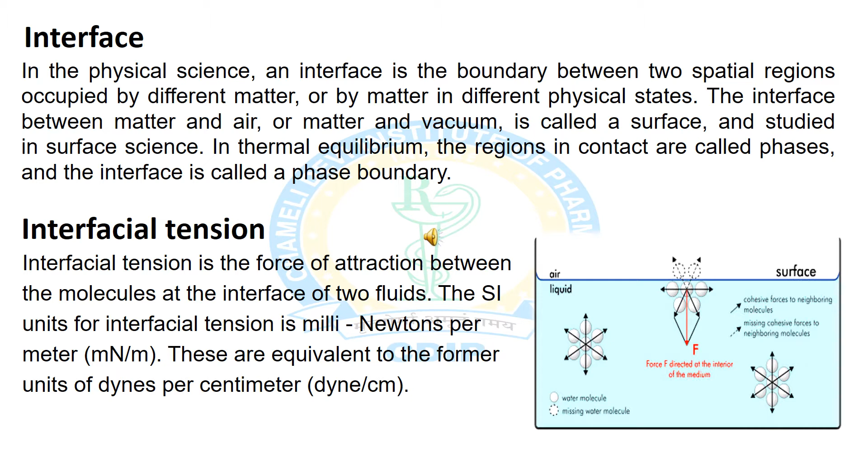Now coming to the next, surface tension. Surface tension is a phenomenon in which the surface of the liquid is in direct contact with the air. Surface tension can also be defined as the force acting at right angles to a line of unit length present in the surface. Surface tension is usually denoted by gamma.

As we all know, work done is equal to force into distance, therefore surface tension can be given as force upon distance. The SI unit of surface tension is newton per meter, or dyne per centimeter. The surface tension of a liquid is the energy required to increase the surface area, which increases the stability of the solution and increases the solubility rate.

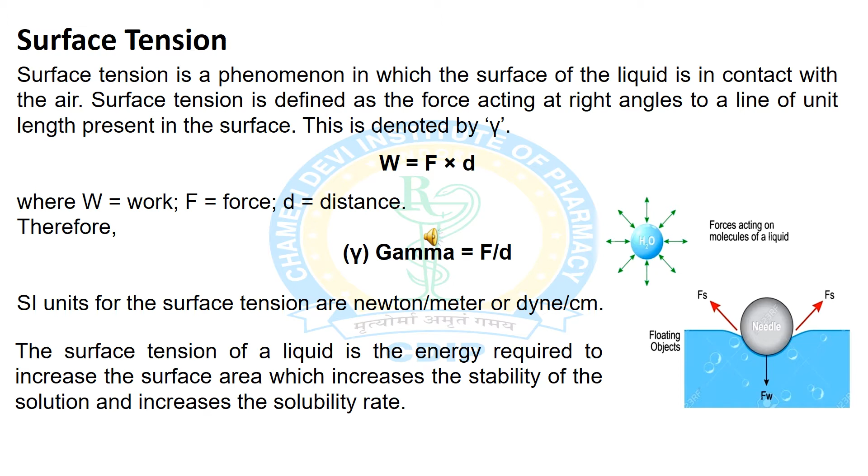As shown in the figure, a needle is floating on a liquid surface whose weight is acting downward and the surface tension force is acting on the molecule. The molecule present on the surface has a force acting on its lower surface, while the molecules in the liquid have the force acting all over the surface.

Next, there are some examples of surface tension. First is walking on water. A small insect such as a water strider can walk on water because its weight is not enough to penetrate the surface. Second example is floating of a needle. Third, surface tension disinfectants. Fourth, soaps and detergents. Next is surface tension and droplets.

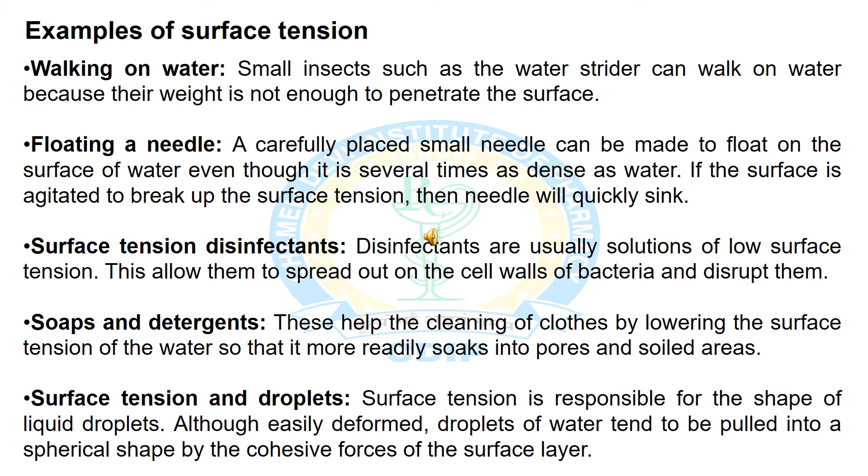Now next is surface tension at a molecular level. In general, water molecules want to cling to each other. At the surface, however, there are fewer water molecules that can cling due to air present above them. This results in a stronger bond between those molecules that actually come in contact with one another. As shown in the figure, a layer of strongly bonded water molecules at the surface, held together by surface tension, creates a considerable barrier between the atmosphere and the water.

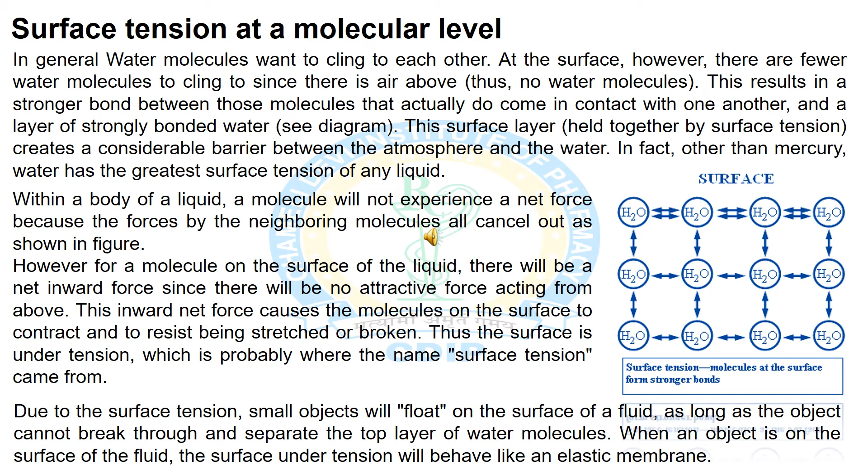The next is the surface tension of water at different temperatures. The table shows the effect of temperature on surface tension. A graph is plotted between the surface tension of water and the temperature. It also shows the variation in surface tension with increasing temperature.

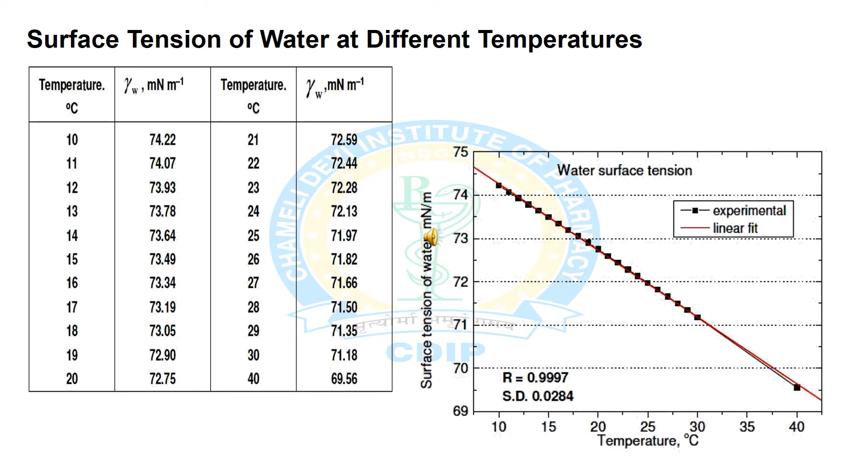Now, the next is measurement of surface tension. How can surface tension be determined? The first method is the capillary rise method. This is the oldest method for the determination of surface tension. A consequence of surface tension at the liquid-air interface is the moving up of the liquid into a thin capillary tube, which is usually made of glass. This phenomenon is applied for the determination of surface tension.

For this purpose, a thin circular glass capillary is dipped into the tested liquid. If the interaction forces of the liquid with the capillary wall, that is the force of adhesion, are stronger than the force of cohesion, the liquid wets the wall of the capillary and the liquid level rises into the capillary up to a defined level, forming a meniscus which is hemispherically concave in nature.

In the opposite situation, the forces cause the liquid level in the capillary to decrease below that in the chamber, and the meniscus is semispherically convex, as shown in figures A and B. If the cross-sectional area of the capillary is circular and its radius is sufficiently small, then the meniscus is semispherical in nature.

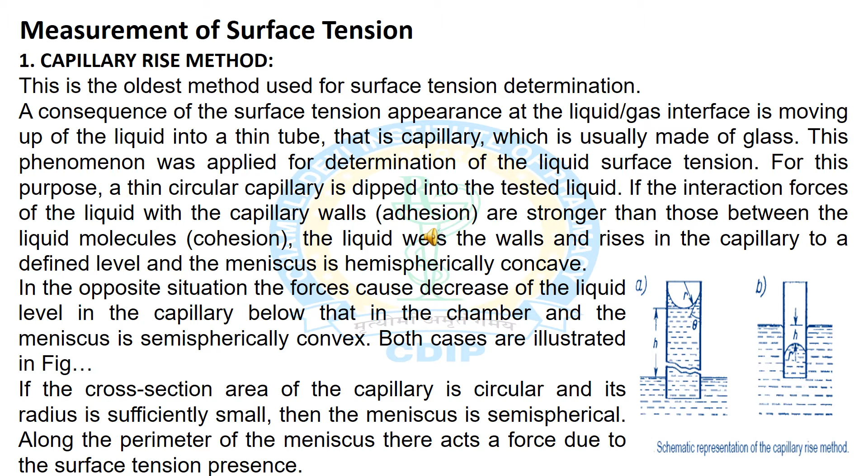If the cross-section area of the capillary is circular and its radius is sufficiently small, then the meniscus formed is semispherical. Along the perimeter of the meniscus, there acts a force due to surface tension, which is given by F1 equals 2 pi r gamma cos theta, where r is the capillary radius, gamma is the surface tension, and theta is the wetting contact angle.

The force F1 in the equation is equilibrated by the mass of the liquid raised into the capillary up to a height h, that is the gravity force, which is given by F2 equals pi r square into h into d into g, where d is the density of the liquid and g is the acceleration due to gravity.

In equilibrium, F1 equals F2, which is given by 2 pi r gamma cos theta equals pi r square h d g. On rearranging the equation, gamma equals r h d g upon 2 cos theta. If the liquid completely wets the capillary wall, that is the contact angle is 0, cos theta equals 1, and in such cases the surface tension is gamma equals r h d g by 2.

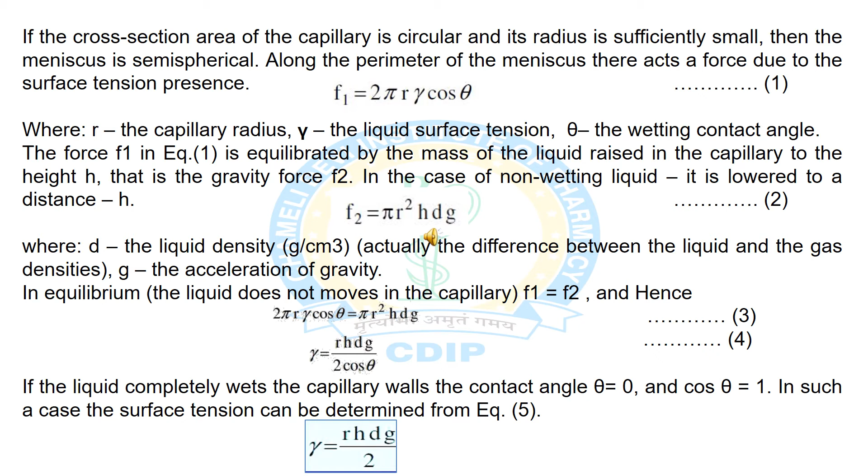The correction factor is required as not all the drops leave the tip on detachment. The tip must be wetted by the liquid so that the drop does not climb to the outside of the tube.

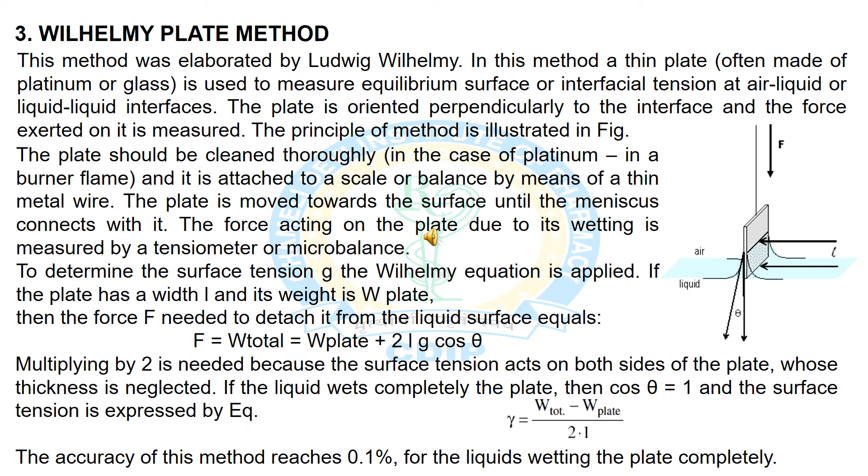The equation is multiplied by 2, as the surface tension is acting on both sides of the plate, whose thickness is neglected. When the wetting angle is 0, that is cos theta equals 1, the surface tension is given by gamma equals W total minus W plate upon 2 into L. The accuracy of this method reaches about 0.1% for liquids that wet the plate completely.

Now, the next method for the determination of surface tension is the ring detachment method or Du Noüy ring tensiometer. In the previous method, we used the platinum plate. Here, a platinum ring is used instead of the platinum plate. As the ring is pulled out of the liquid, the force required to detach it from the surface of the liquid is measured, and the force is related to the surface tension. The platinum ring should be very clean, without blemishes or scratches, because they can alter the accuracy of the results.

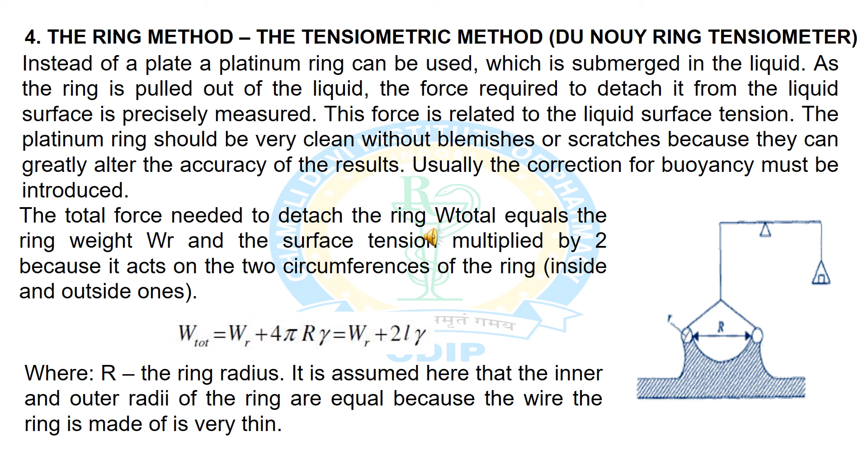The total force needed to detach the ring equals the ring weight plus the surface tension multiplied by 2, as there are two surface circumferences on the ring. The formula for the total force is given by W r plus 4 pi r gamma, or equals W r plus 2 into L into gamma, where r is the ring radius. It is assumed that the inner radius and the outer radius are equal.

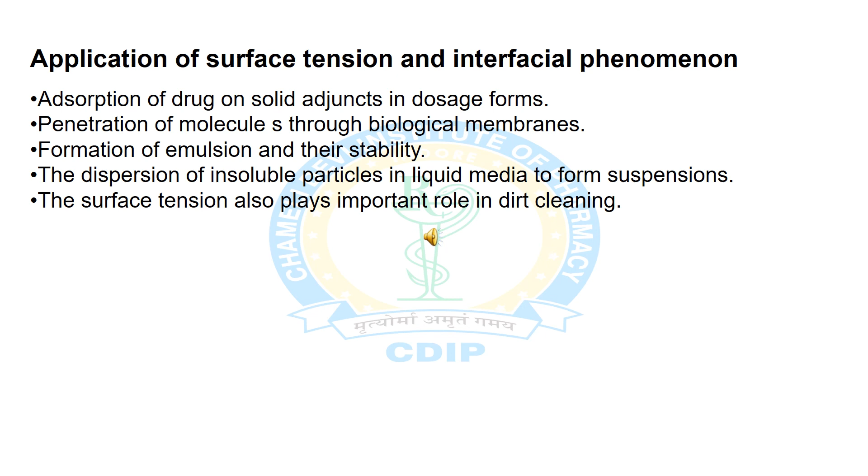Next are the applications of surface tension and interfacial phenomena. First, adsorption of drugs on the solid adjuncts in solid dosage forms, penetration of molecules through biological membranes, formation of emulsions and the stability of emulsions, and the dispersion of insoluble particles in liquid media to form suspensions. Surface tension also plays an important role in dirt cleaning.